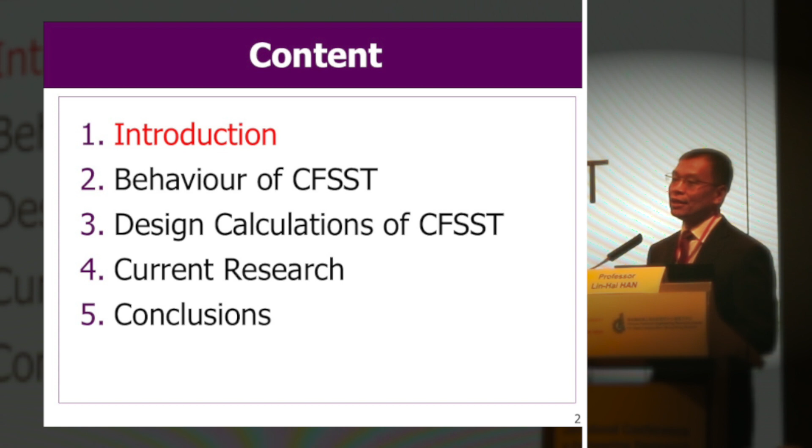So what I would like to talk about today includes some introduction for the background, and some work on the behavior and design calculations of CFSST structures. Before the conclusion, I would like to introduce some of the current research work that we have done at Tsinghua University.

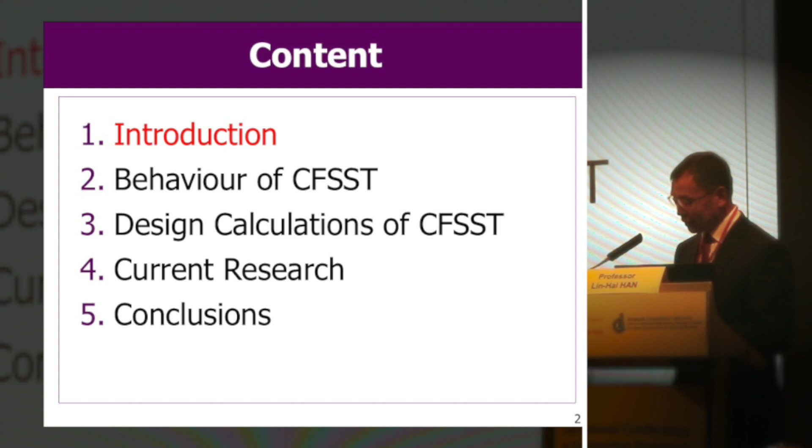In mainland China, for the design of high-rise buildings, for instance for the column, normally we have options: reinforced concrete, steel reinforced concrete - actually putting an I-section inside the concrete to strengthen the column behavior - steel structures, and concrete filled steel tubes.

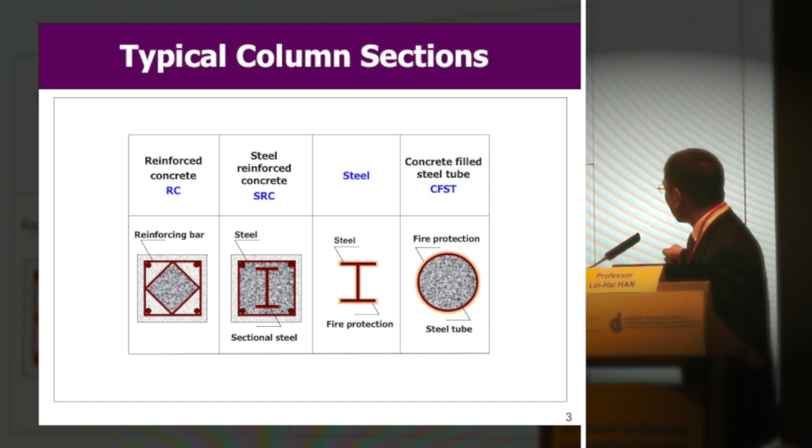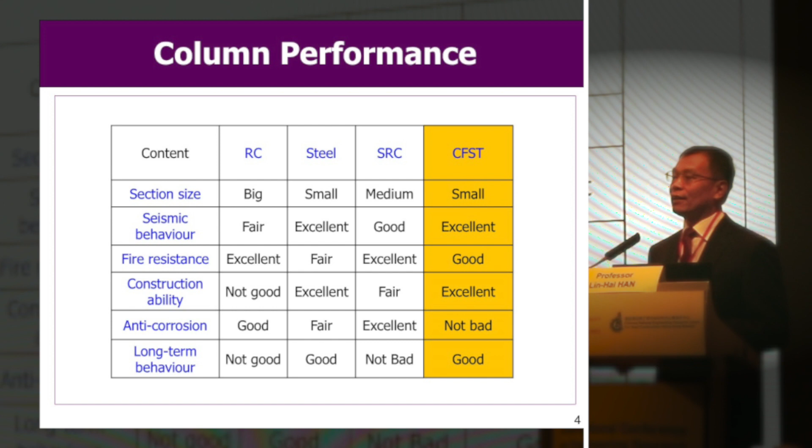The steel tube here is carbon steel tube. This table gives a very general comparison of column behavior and performance: section size, seismic behavior - because in mainland China about 80 main cities are under the hazards of seismic activity - fire resistance, construction ability, anti-corrosion, and long-term behavior. The long-term behavior here refers to the effects of concrete shrinkage and creep. For CFST, you can see the comprehensive behavior is good.

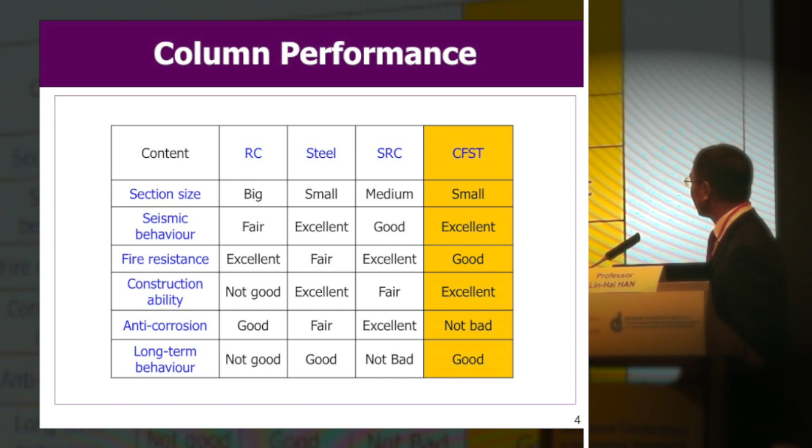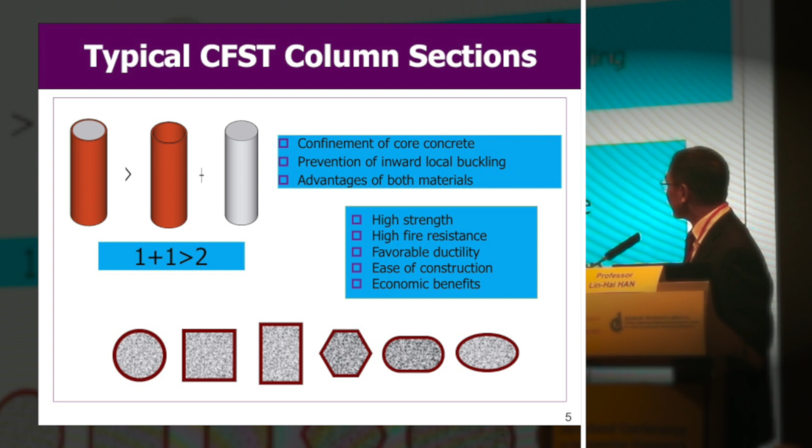This concrete filled steel tube has typical column sections: circular, square, rectangular, and different shapes. The effect of 1+1 greater than 2 is actually the interaction between the two materials during the loading process. In mainland China, we also have general sections.

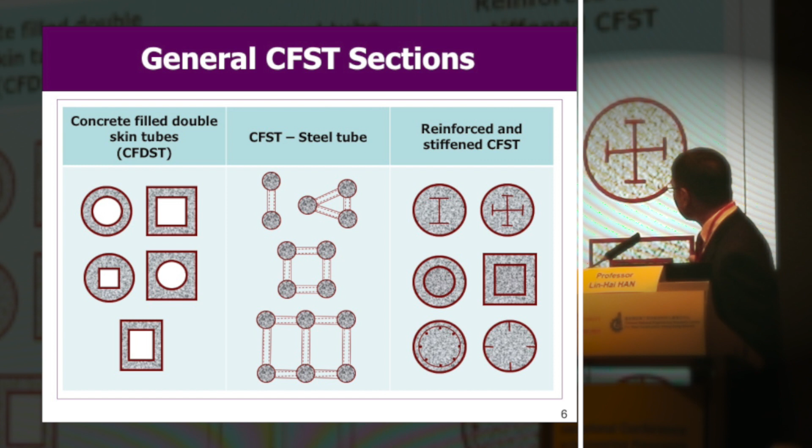For instance, double skin steel tube - inner steel tube, outer steel tube, with concrete in between - different combinations. Also CFST connected with hollow steel tubes to form sections. And also reinforced or stiffened CFST, putting an I-section or reinforcing bar inside the concrete to strengthen the structural behavior.

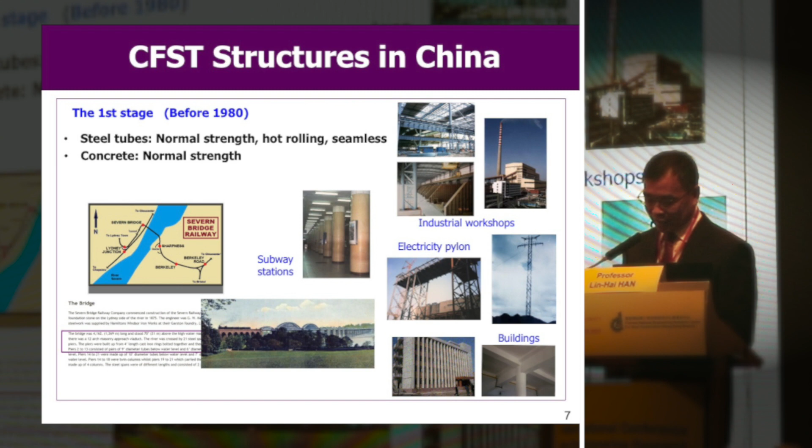In mainland China, CFST development can be generally divided into 3 stages. The first stage is before the 1980s, where steel tube was normal strength, for instance 235 megapascal. Fabrication of the steel tube was hot rolling, seamless. Concrete was normal strength, cubic strength less than 50 megapascal. Applications included subway stations, industrial workshops, and pillars of electricity transmission towers.

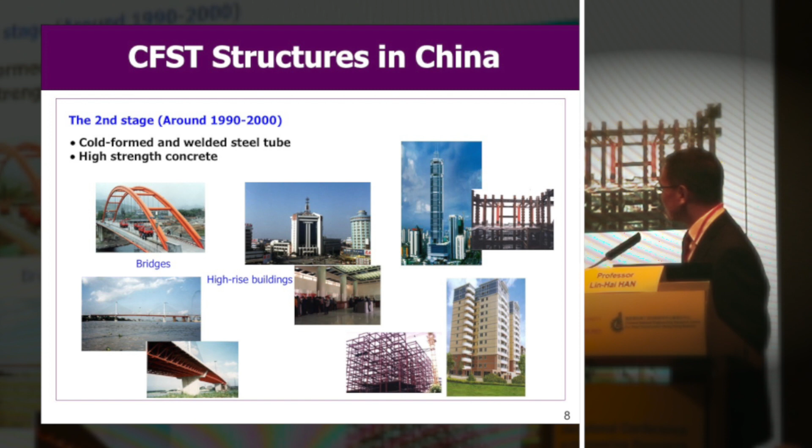The second stage is around 1990 to the beginning of the new century. At this stage, fabrication of steel tube used welded or cold-formed methods, and concrete strength increased to around 50 to 70 megapascal. This type of structure was used in bridges, high-rise buildings, and also dwelling halls.

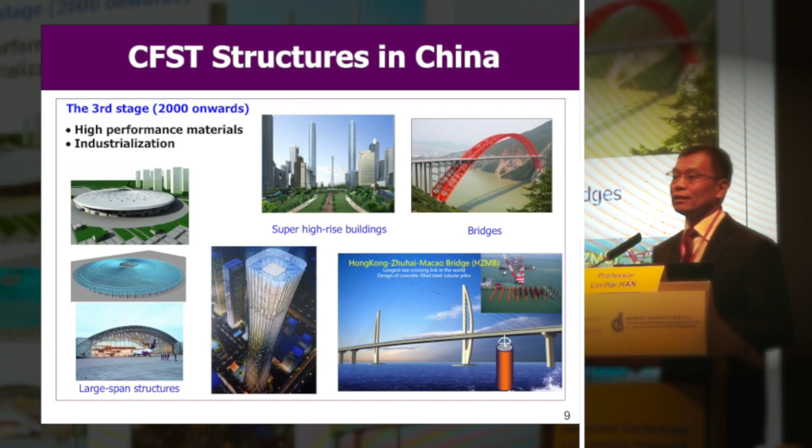Actually, the foundation is concrete filled steel tubes. This forms a strong foundation to support the pillar here.

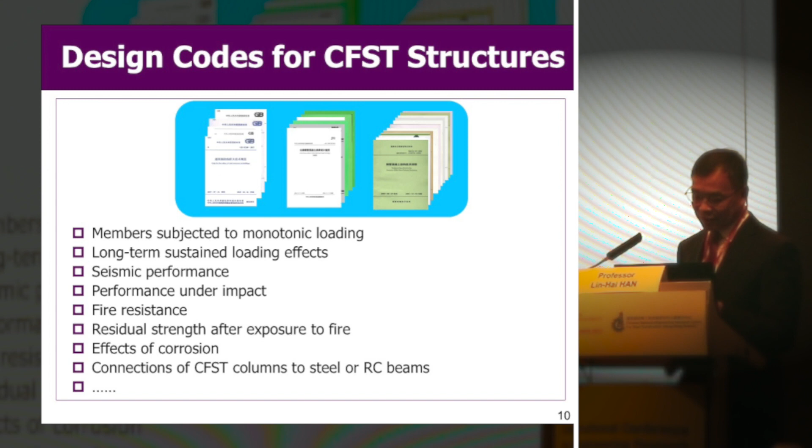In mainland China, we have design codes for CFST structures: national, industrial, and local codes. These regulations include design methods for members subject to different loading conditions, fire performance and residual strength after fire, effects of corrosion, and connections of CFST columns to RC or steel beam sections.

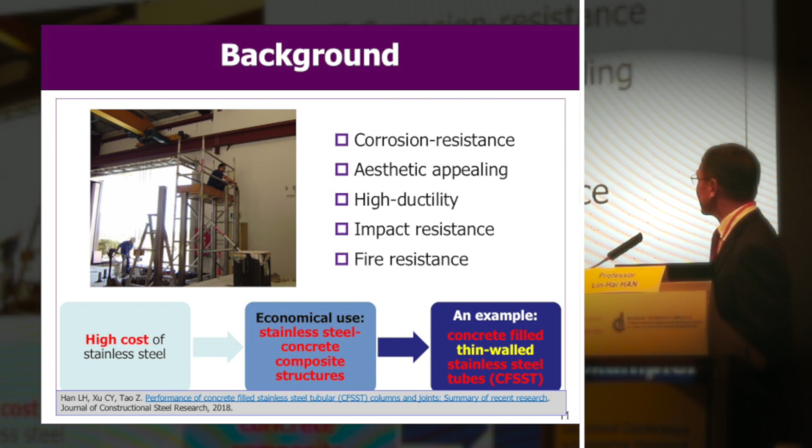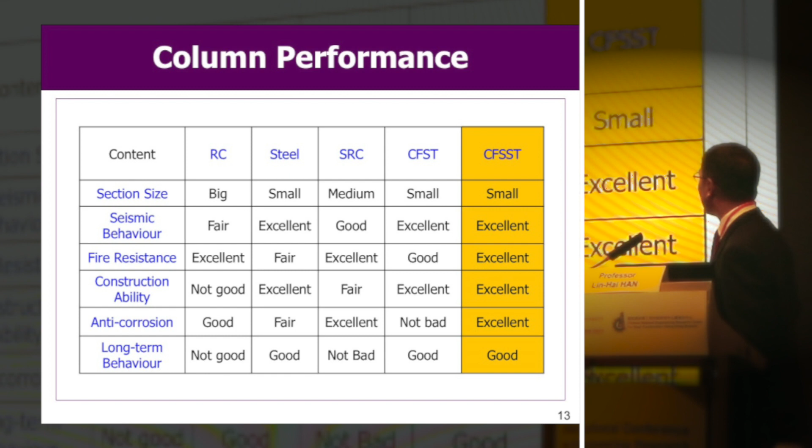This can reduce the amount of use of stainless steel, thus reducing the cost. It can achieve high ductility, fire resistance, and also aesthetic appeal. If we put CFSST as a new member, we can compare column performance.

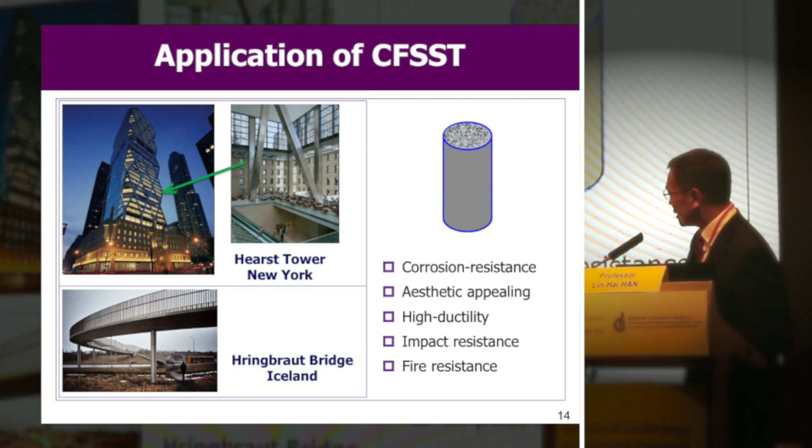You can see the comprehensive performance of CFSST here. Currently in the world, we have some applications of CFSST. For instance, the Hearst Tower in New York City uses concrete fill stainless steel tube columns. Also, there's a bridge, the Hringbraut Bridge in Iceland, where the pillar is concrete fill steel tubes with stainless steel tubes.

In Hong Kong, we have a bridge called the Stonecutters Bridge, in Chinese Angchuanzhou Bridge. The tower is 295 meters in height, and the top part is 120 meters. This top part is actually concrete fill stainless steel tubes.

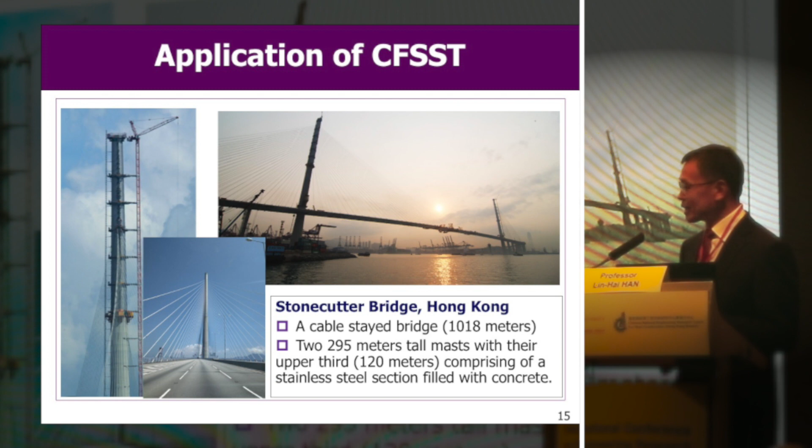This photo was taken two days ago by Dr. Fa Chen from Tsinghua University, when we came from the airport to this hotel.

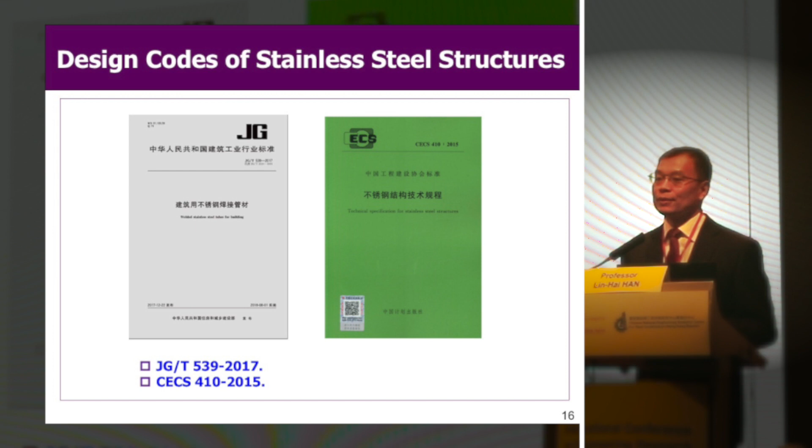In China, we don't yet have a design code for concrete fill stainless steel tubes, but we do have design codes for stainless steel structures. We have also just published a new industry code for the fabrication of stainless steel tubes, published by the Chinese government.

So if we would like to draft design codes for concrete fill stainless steel tubes, we need to understand the basic behavior: static performance, dynamic performance, fire performance, and construction issues. Construction issues are quite similar to those for normal concrete fill steel tubes. Normally, the hollow steel tube is fabricated first, then enters construction with load, with considerations for the welding of stainless steel tube, concrete compaction, and durability design.

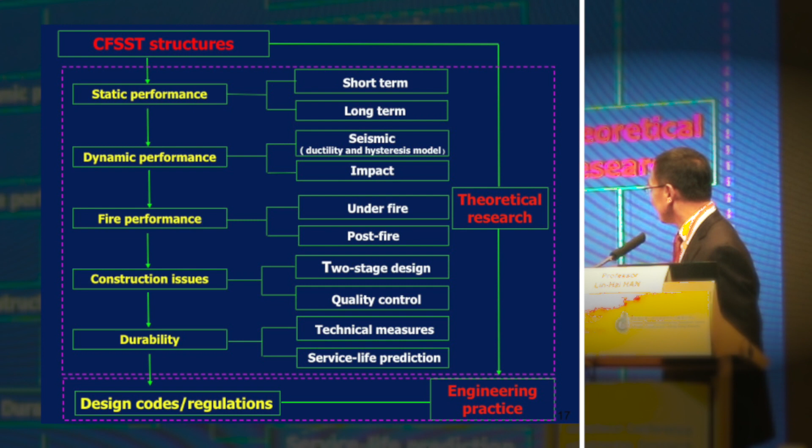All this is theoretical research. The purpose of the research is for design codes, regulations, and also for engineering practice.

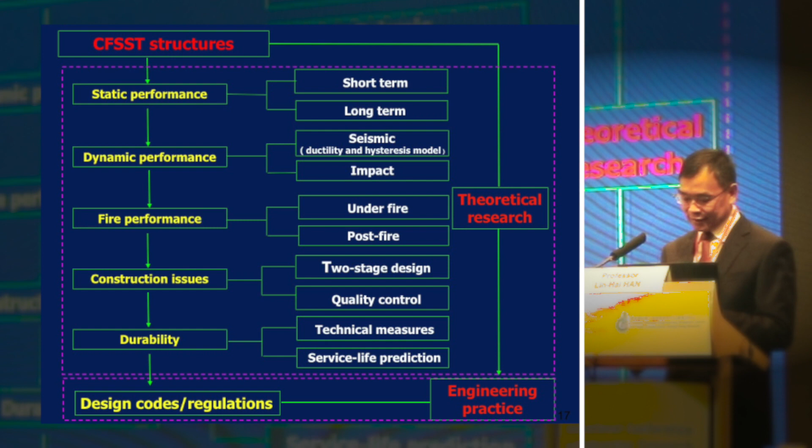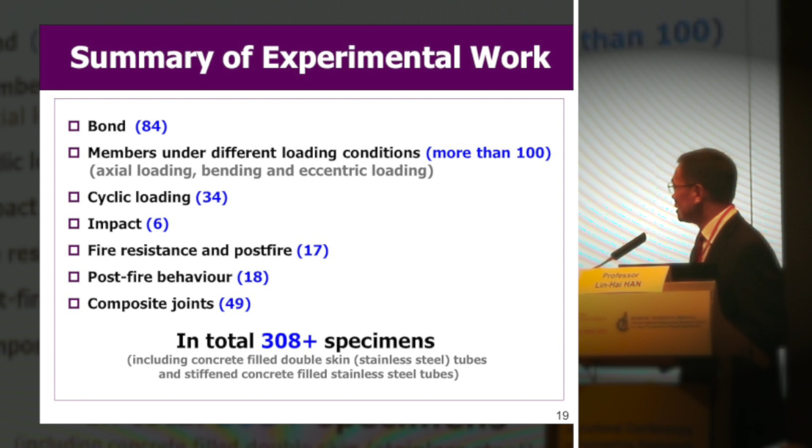Under this project at Tsinghua University, we are doing research work including basic experimental studies to check the bond behavior between stainless steel and concrete, members under different loading conditions, cyclic loading performance, impact and fire resistance, post-fire behavior, and composite joints. This is a summary of the work: bond behavior and members.

Something that may be interesting to you: the bond between the core concrete and the outer steel tube is critical for this type of composite structure, to ensure that the core concrete and outer steel tube work together during the loading process. So the bond behavior is crucially important.

Our first step is to check the bond strength between the stainless steel tube and the core concrete. One of the most significant differences between carbon steel and stainless steel is the roughness of the steel surface, so we measured the surface very carefully to compare the differences between the two types of tubes.

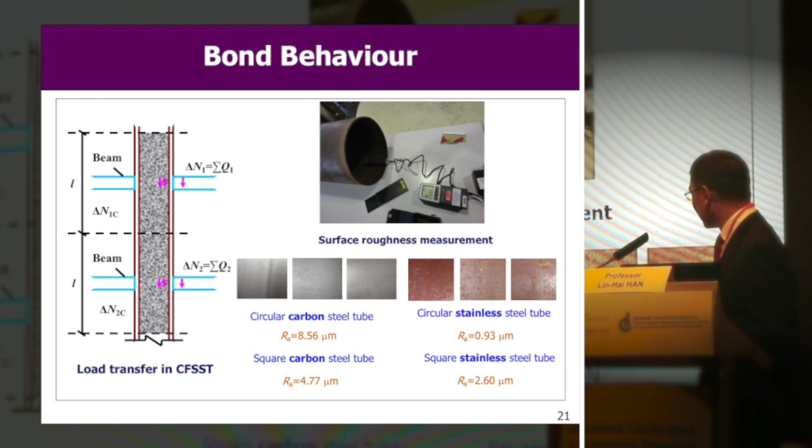You can see some interesting measurement results. For carbon steel tube, the roughness is about 8 micrometers. For circular stainless steel tube, however, it's less than 1 micrometer. This means the stainless steel tube surface is much smoother than that of the corresponding carbon steel tube, which may not be good for the bond strength.

So we ran a type of push-out test. You can see the spacing here, a gap, where the applied load acts exactly on the core concrete only, to push the core concrete and check the slip at the boundary between the steel tube and the core concrete. Before the test, we can observe some separation change because of the shrinkage of the concrete, so it's a changeable separation.

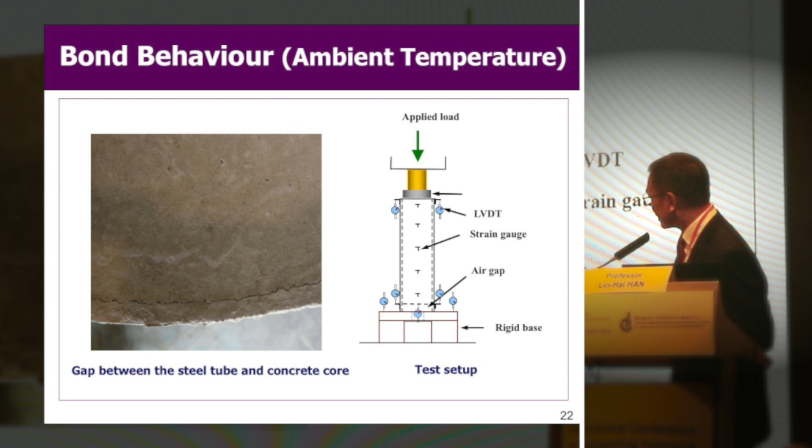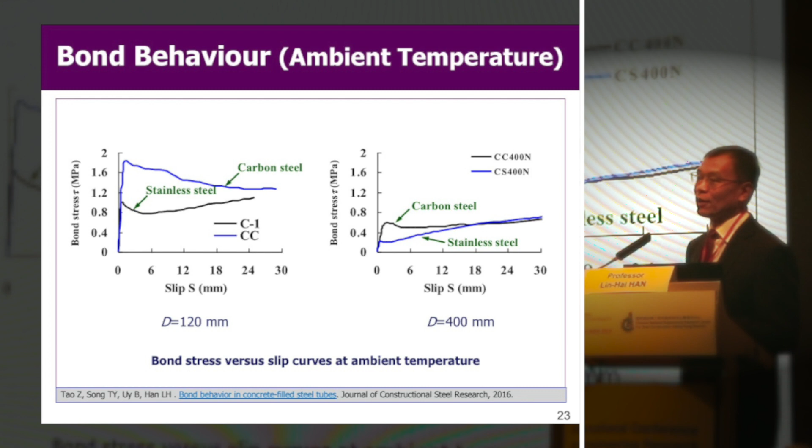For the larger section, you can see the lower bond strength; the larger the cross section, the lower the bond strength. Carbon steel goes this way, but stainless steel goes this way, showing different characteristics in how the bond strength progresses with the loading process. This is because the microstructure at the interface between the concrete and the outer steel tube changes a lot during loading, differently for the two types of steel tubes.

We also checked the bond behavior at elevated temperature, using this type of test.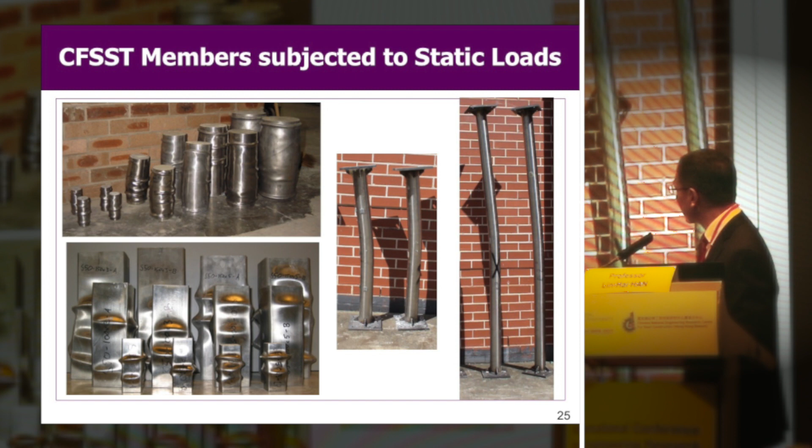And we have some comparisons of the compressive behavior of concrete filled stainless steel tube with the corresponding carbon steel tube filled with concrete. You can see the full response of the loading and the axial strain. This actually is a carbon steel tube filled with concrete, and this is stainless steel tube.

So if we put the denominator as the maximum strength of the curve, you can see for the stainless steel tube, the curve goes to a point, declining and then increasing because of hardening of the steel. But for carbon steel tube, it goes to the peak and then declines. This is because of the different material properties - austenitic stainless steel tube was used for these specimen comparisons.

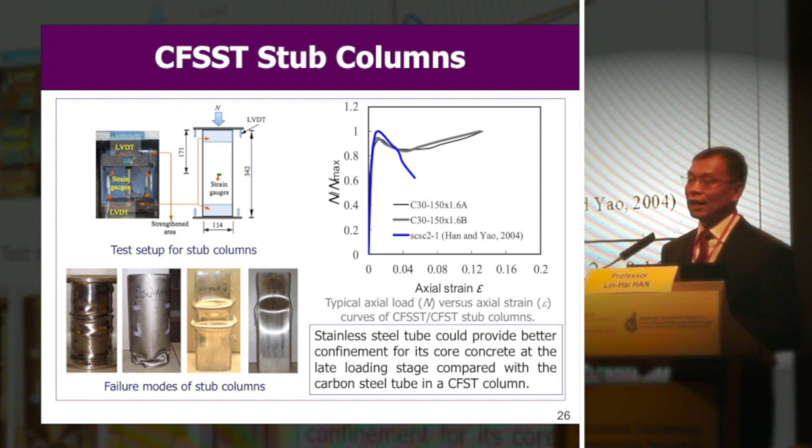So this means for concrete filled stainless steel tube, at the later stage, the steel tube can provide a better confinement compared with the carbon steel tube. This is a very important factor - the confinement factor for concrete steel tube.

This is the only equation in this presentation. You can see this ratio actually can reflect the effects of the concrete and also the outer steel tube. The denominator is the concrete area and the concrete compressive strength, and the numerator is the area of outer steel tube and the yielding strength. So the higher this ratio, the higher confinement that the steel tube can provide to its concrete.

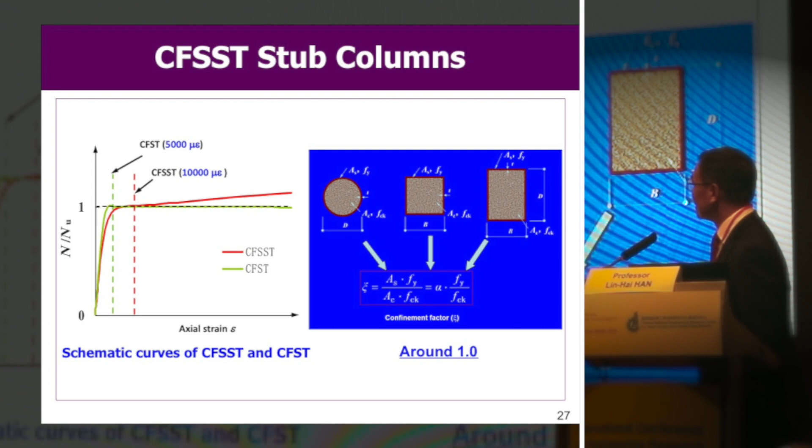You can see for concrete filled stainless steel tube, the curve goes like this way. For carbon steel tube, it goes like this way. So the ultimate state is different. However, we still haven't used the hardening effects of the stainless steel tube - this needs to be checked very carefully in our future research.

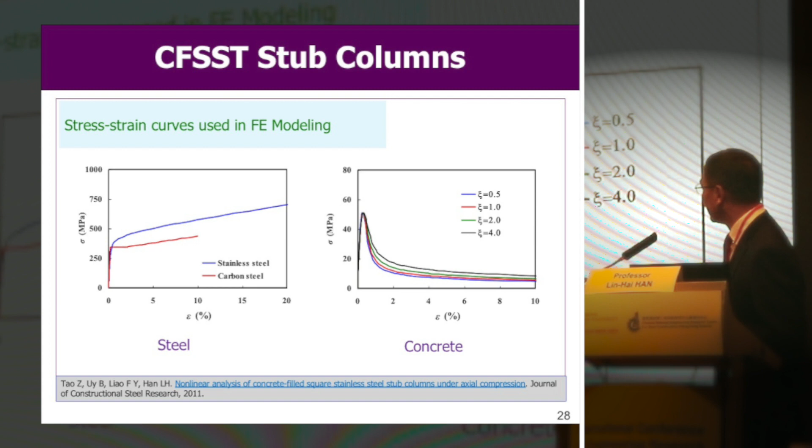You can see the stainless steel tube stress-strain relations, carbon steel, this austenitic steel properties. For the confined concrete, under different confinement factors, you can see the concrete curves go like that.

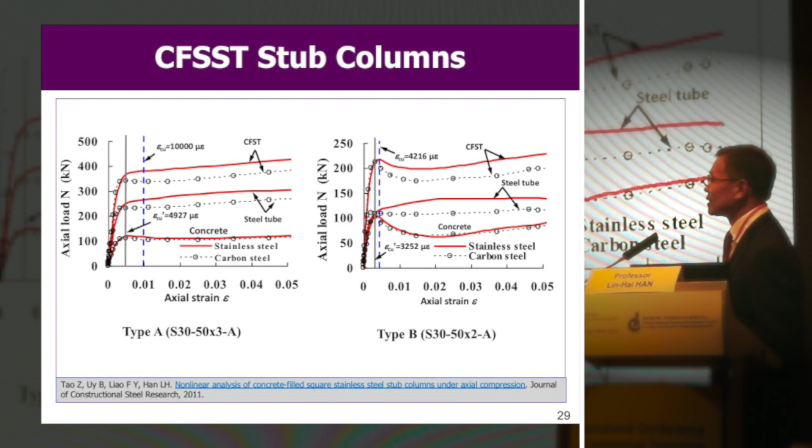So this numerical analysis checks the contribution of the outer steel tube and the inside concrete. You can see the contributions of the stainless steel tube, the hardening effects.

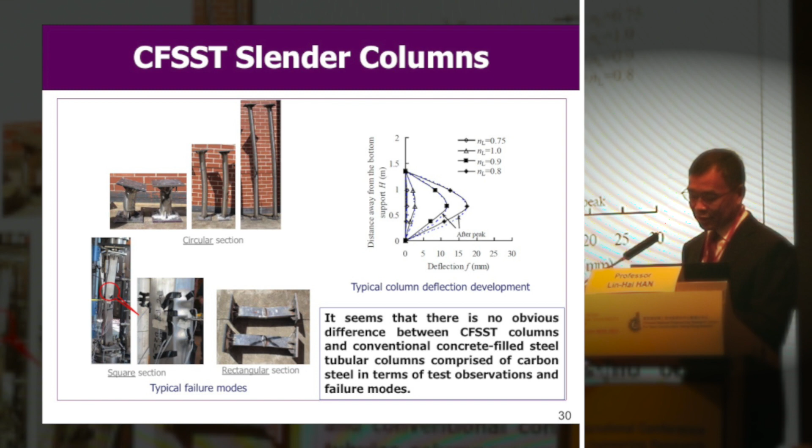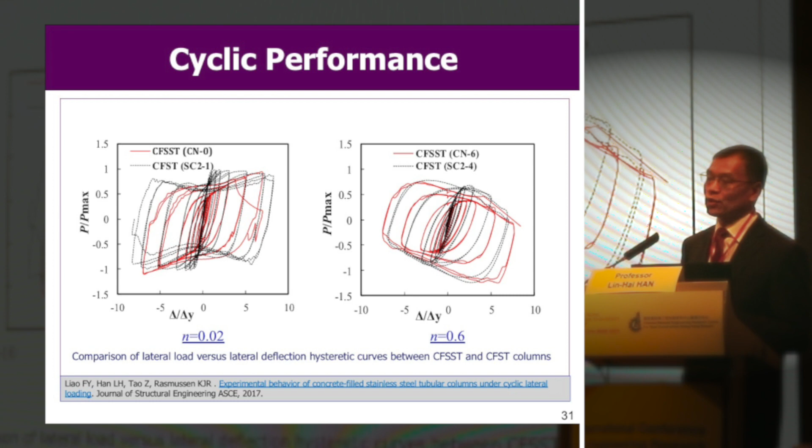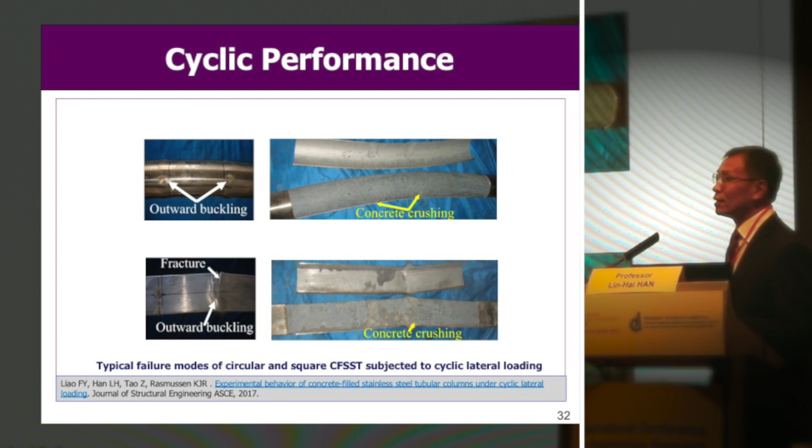We check the concrete surface. You can see the concrete and the steel tube can work very well, so the concrete can keep integrated during the loading process, even after failure.

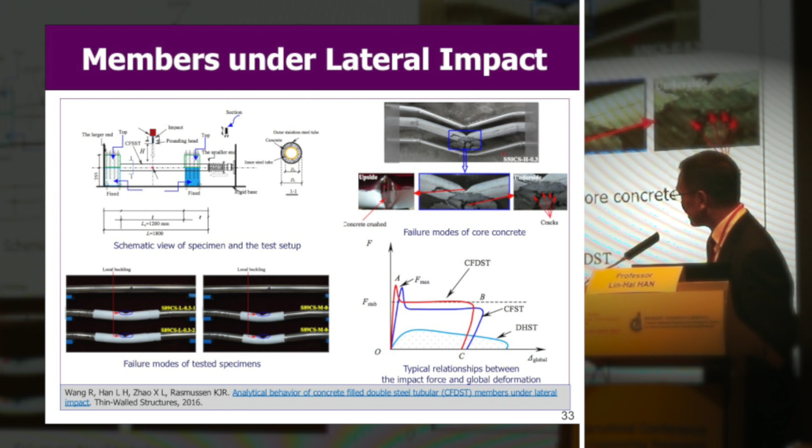Whenever under lateral impact, you can see again - we remove the outer stainless steel tube, and you can see the concrete still keeps well, though there's a very large deformation of the specimen.

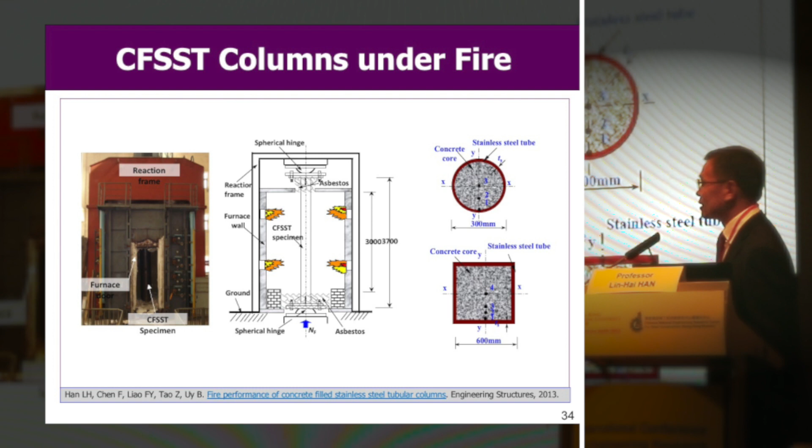Under fire, we have done some tests from 300 millimeters to 600 millimeters - actually very large, full scale tests. You can see after the test, a very beautiful failure mode - an outward failure of the outer stainless steel tube. You can see the concrete keeps well even after failure of the structure.

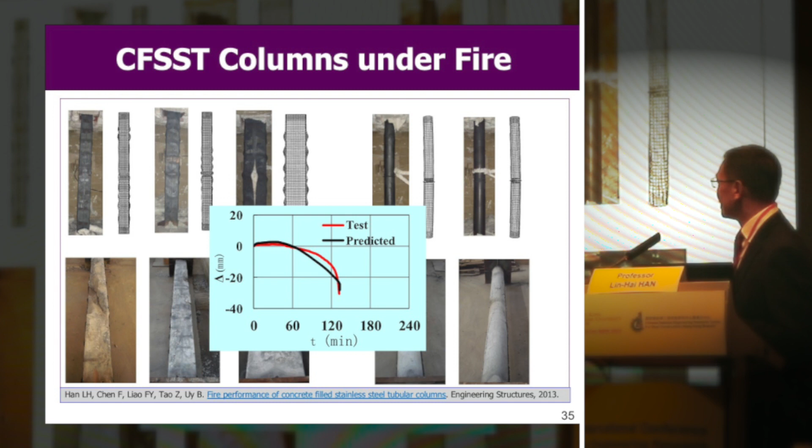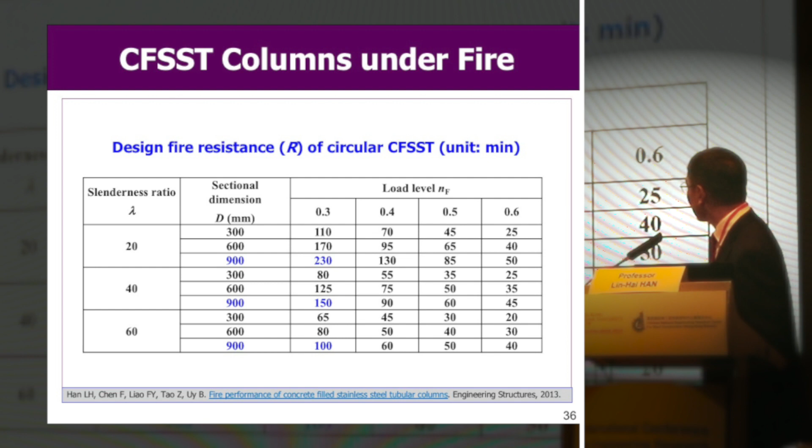We have developed a model to predict the structural behavior as well. For the concrete fill stainless steel tube, we have a very desirable fire resistance. For instance, the slenderness ratio is 20, if the section dimension of circular section is 900 millimeters, without any additional fire protection, the fire resistance could be 230 minutes. This means for concrete filled stainless steel tubular columns, we can achieve 3 hours fire resistance without any additional fire protection, even at very high loading ratio during the fire.

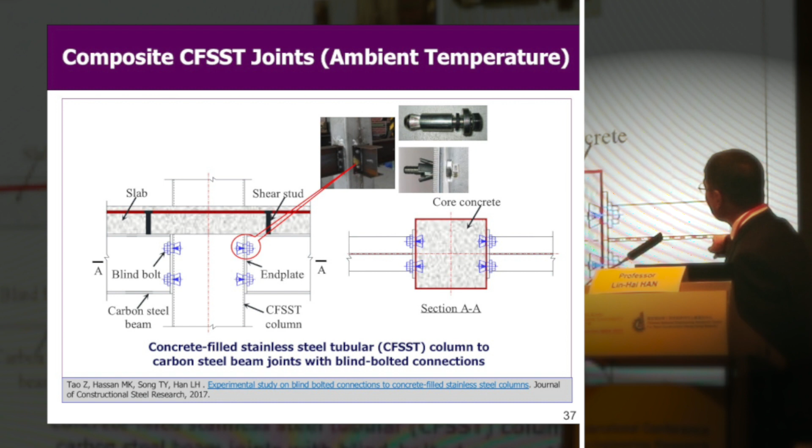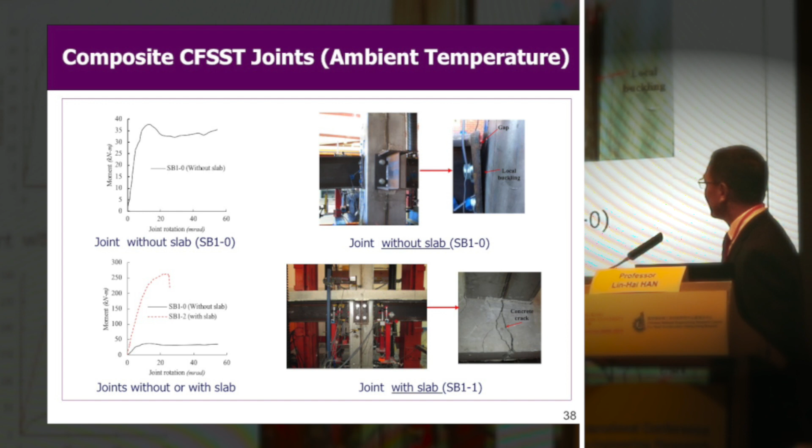So we also have done some tests of composite joints - it's a stainless steel tube filled concrete, using a kind of blind bolts with a steel beam. You can see the moment and the joint rotation curves show a very correct manner of the ductility of the structure.

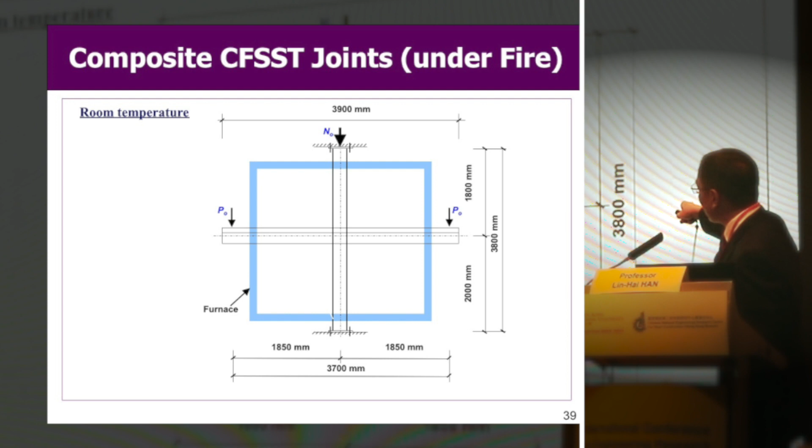We also check the composite joints under fire and loading. This furnace actually loads the columns and the two segments of the beam, then applies fire until failure. Again, we have achieved the column failure mode and beam failure mode.

For the beam, the following failure mode is buckling of the flange, and for the column failure mode, you can see again the overall local buckling.

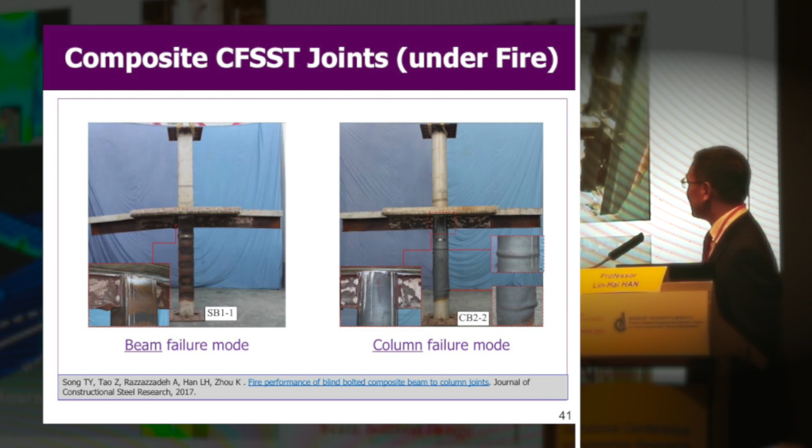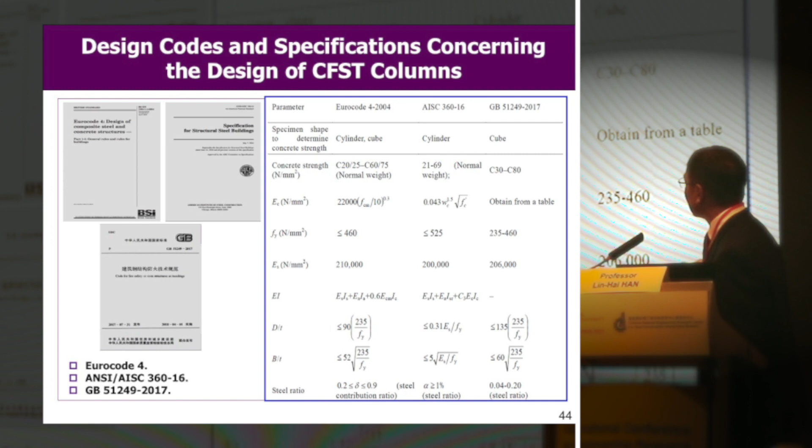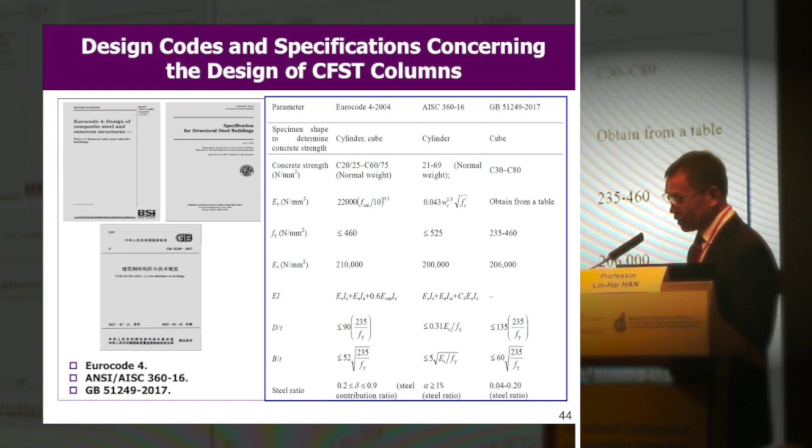We compare three codes from Europe, America, and China. This code is specially drafted for normal carbon steel tube filled with concrete, and it has limitations for the design of concrete filled steel tubular structures. Our purpose is to check and calibrate the validity of these design codes for concrete filled stainless steel, so we made some comparisons.

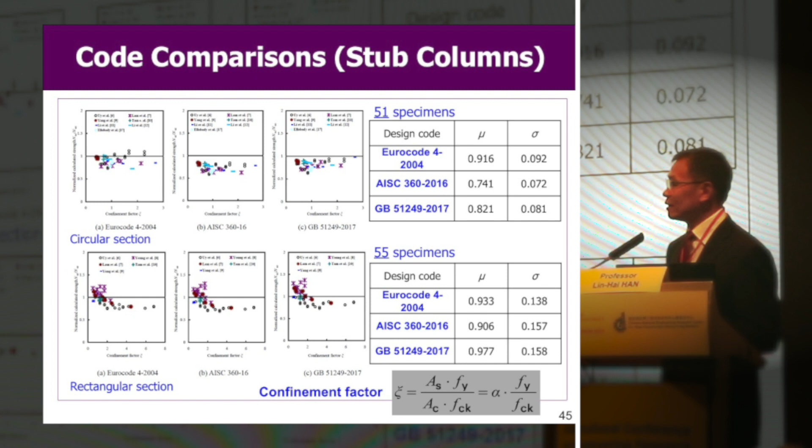You can see the mean value and the standard deviation. Generally, the design regulations for concrete carbon steel tubular columns give a lower prediction for concrete filled stainless steel tube. But for some cases, particularly for very small specimen sizes, the test results give unconservative comparisons, so we are still checking these size effects very carefully in our research group.

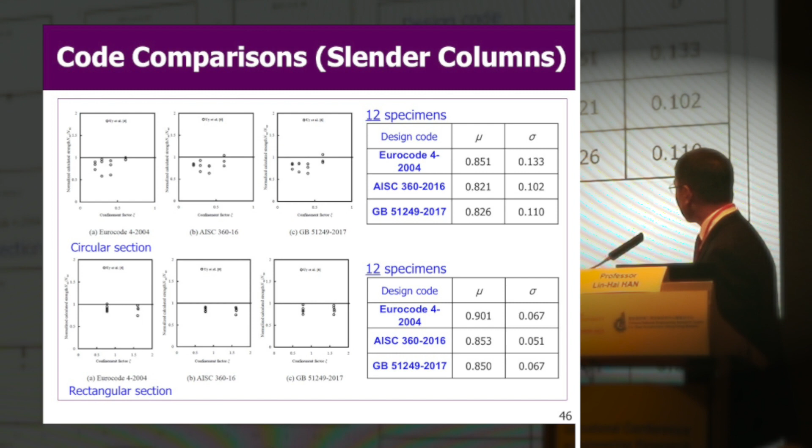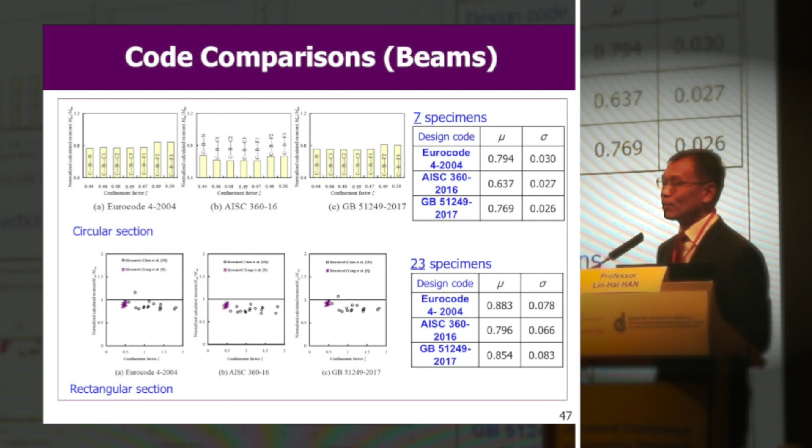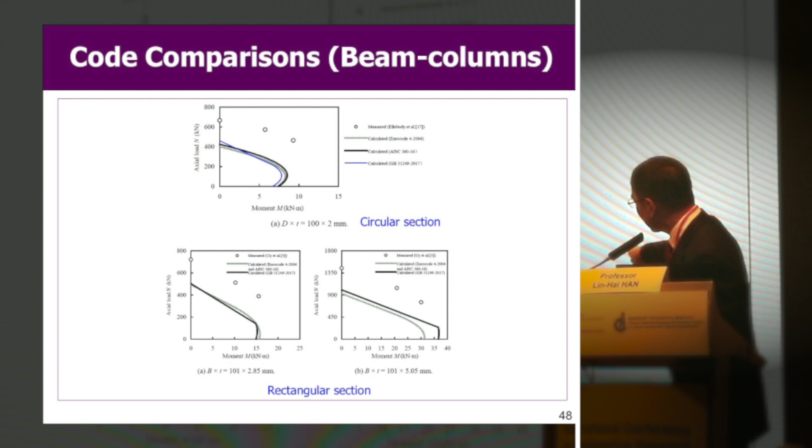For the beam and for the circular column, you can see concentrated predictions, and the standard deviation as well. For the beam you can see very conservative predictions. For the beam columns, you can see the curve - this curve is for circular Europe code, this is Chinese code, and here the measured points are very concentrated.

So just before my conclusion, let me give a very brief introduction to our research group currently.

We are trying to do life cycle based work. The life cycle based study for concrete filled stainless steel tube structures can be summarized in three points. The first is the performance of the structural members under different loading, particularly extreme loading, during the full range of the life cycle - for instance, blast, fire, impact, and sometimes their combination effects.

Also the performance of the members during the full life cycle including the construction process - for instance, the effects of fabrication of steel tubes, residual stress, possibly initial imperfection of the concrete, and also long-term effects such as shrinkage and creep of concrete.

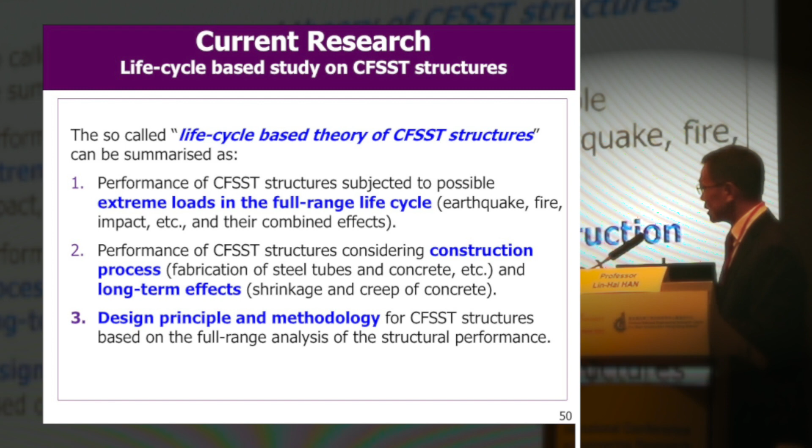Finally, we would like to develop a design principle and methodology for this type of structure. Currently we are doing some tests, long-term tests, applying load on the specimen to age it.

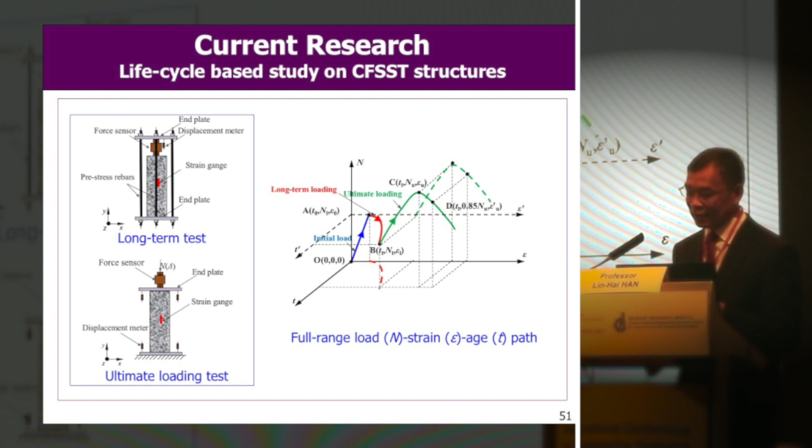This is a full-range load strain age test - this loading, this age, this deformation curve - so we measure the long-term behavior. We apply the load to the design load, keep the load constant to measure shrinkage and creep, then age it and apply load to failure. This is very simple, but can generally reflect the working conditions for the concrete filled stainless steel tube under service load and long-term load.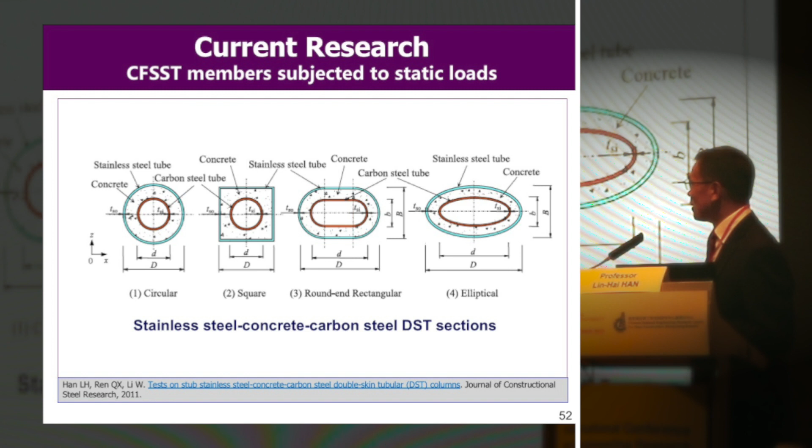We have also done some work on different combination sections - for instance, the outside is stainless steel tube, the inside is carbon steel tube, and the center region is concrete. My colleague at Tsinghua introduced this work yesterday in his presentation.

We also tried work on concrete filled bimetallic tubes, so the outside surface is stainless steel and the inside is carbon steel tube, filled with concrete. We have some initial research outcomes published on similar structures last year.

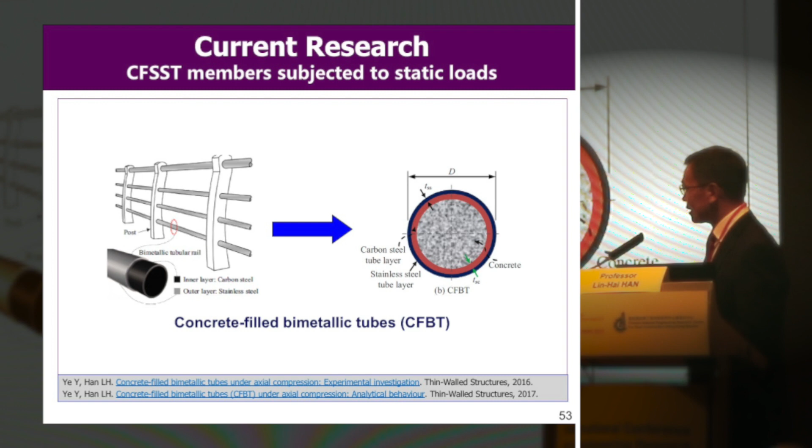From the conclusions, it can be observed that the bond strength between the stainless steel tube and concrete is lower than normal carbon steel tube and concrete. This is an issue we have to face, to give a safe design bond strength.

So for larger specimens, for instance sections, we will need additional shearing studs. This will give some improvement.

Stainless steel tube can provide better confinement, particularly at the later stage because of hardening of the materials. And the CFSST column has higher energy dissipation and higher energy absorption ability under cyclic loading and impact loading.

The fire resistance of the CFSST is much higher than that of the corresponding carbon steel tube filled with concrete. So in most cases in practice, without any additional fire protection, the concrete filled stainless steel tubular column can achieve more than 3 hours fire resistance. This is good news for this type of structure.

So design guides and codes need to be developed for this research step by step, and we are trying to do some work on this as well.